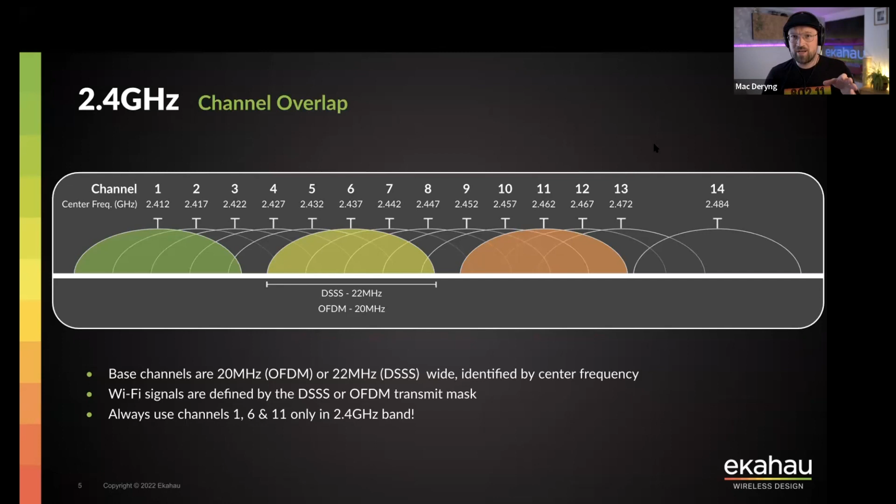But because of what Matt has mentioned, differences in regulatory domains and channels available in different countries, it is the best practice to stick to channels 1, 6, and 11, 3 non-overlapping channels, because even if you have 4 or 5 channels available if you're in Japan, most of the vendors out of the box will have channels 1, 6, and 11 enabled by default. And we will talk you through why and how it matters, what happens when you have overlapping on the same channel and overlapping on adjacent channel.

So Matt, could you? Sure. So when we look at the 2.4 gigahertz spectrum here, if you're inside the US, you can do a 3-channel plan, 1, 6, and 11. But if you're inside of Europe, for example, you can do a 4-channel plan where the channels do not overlap, channels 1, 5, 9, and 13. And why is it that we don't recommend that, and we are saying stick to just channels 1, 6, and 11?

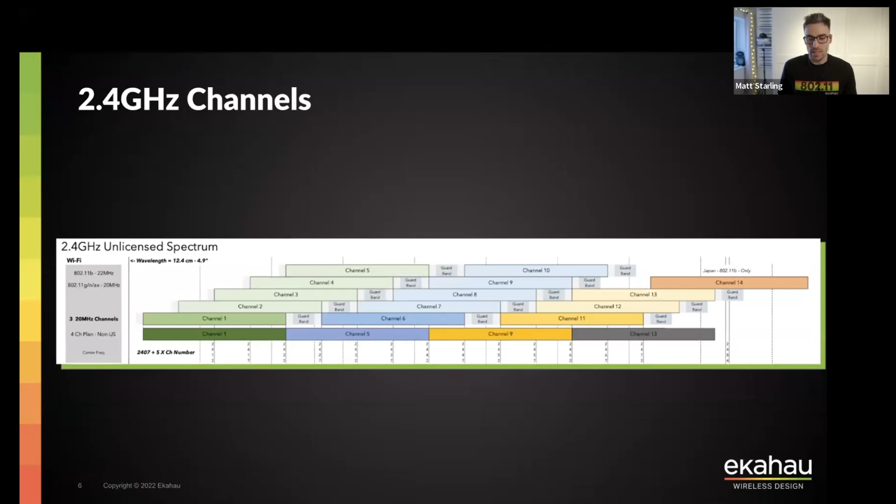That's because in our experience, we have never gone to an environment where there have never been any other 2.4 gigahertz wireless networks around by your neighbors or surrounding buildings. They've got their own wireless networks, and they're going to be using channels 1, 6, and 11 typically as well. So if they're using 1, 6, and 11, and you're using a 4-channel plan of 1, 5, 9, and 13, why is that bad? Because that causes something called adjacent channel interference.

So when we look at this graphic here, let's say in this example, they've picked to use channel 3 and channel 9. You can see how much that overlaps with channel 6. So why is that a problem? To keep it as simple as possible, adjacent channel interference is like Mac trying to talk to me in Polish. I've got no idea what he's saying. I don't speak Polish. I have no idea when he's going to stop talking so I can have my turn to start talking.

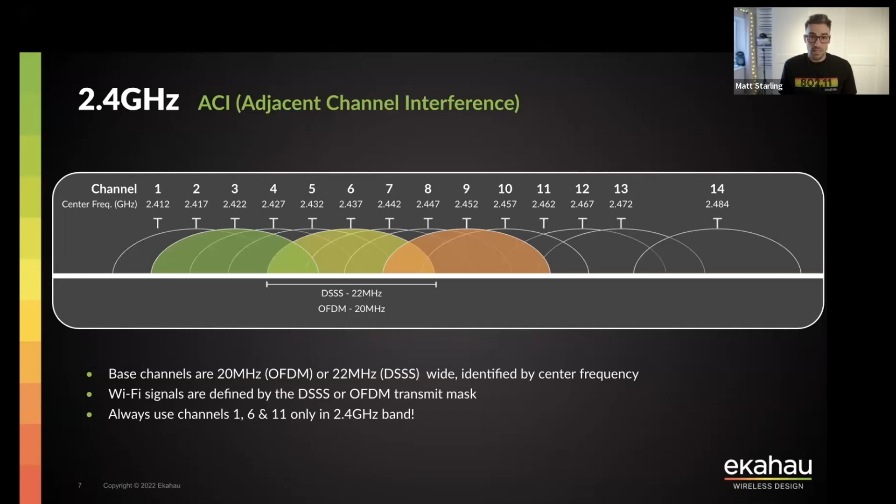So the reason why we say stick to 1, 6, 11 is because if you are going to have other access points and their radios on the same channel as you, it's much better to have what's called co-channel interference or co-channel contention, because this now means that when Mac is talking to me in English, I can understand what Mac is saying.

I speak English. I can understand when Mac's talking English, some of the times anyway. But I know when he's going to be finished talking, so then I can understand when it's my turn to be able to talk, because Wi-Fi is a listen before you talk protocol. So if it detects that anyone else is trying to transmit or talk over the air when you want to be, it will back off, let them finish talking before it will try and talk. Typically, anyway. Typically, yes.

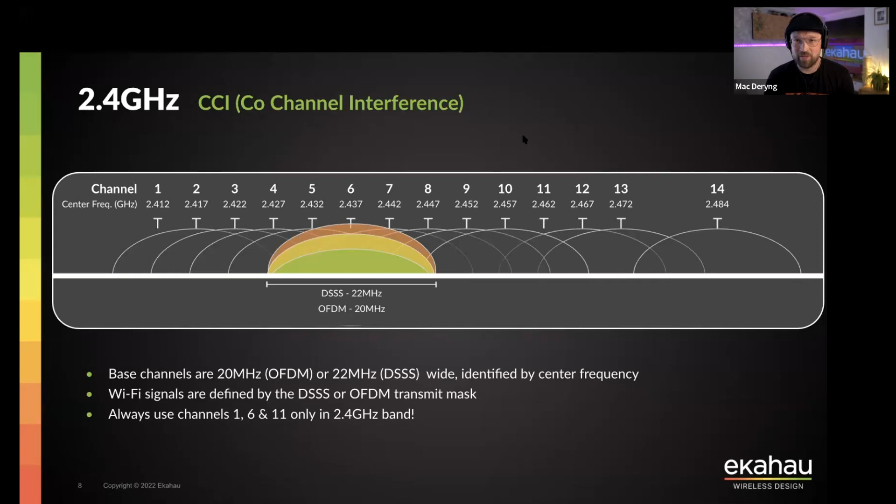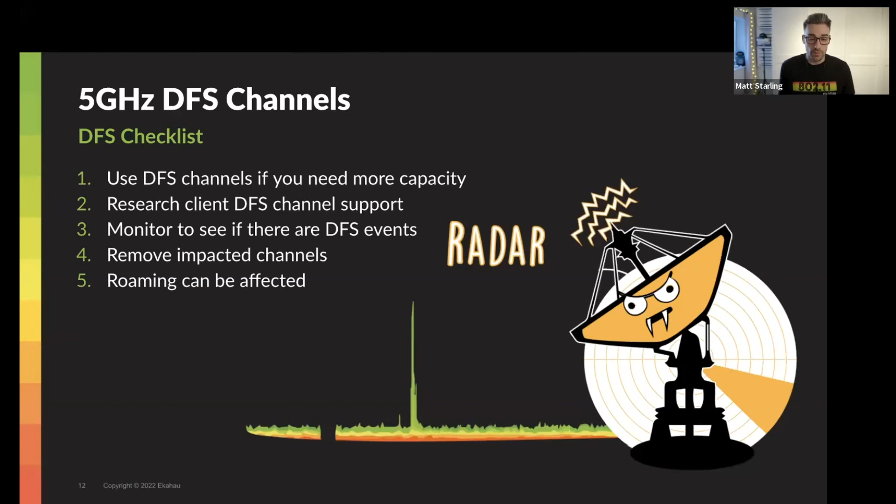So it's really important that we check what our client devices are capable of doing when we're doing the design. And in our 3 steps to great Wi-Fi every day, step 1 is extremely crucial: when you're having that conversation with the stakeholders who you're designing the Wi-Fi for, you need to understand what are the client devices that are going to be using the wireless network.

Because in this example, if we had just turned on channel 144 on our controllers, included it in our Wi-Fi designs, but then the stakeholder that you're doing a design for, their client devices don't support channel 144, as they move around the environment, they're going to potentially have some coverage holes, some coverage gaps, because they don't see the SSID being broadcasted from one of the access points that's using channel 144. So it's really crucial that we understand what our client devices support for what we're designing the wireless network for. So that's why it's really important.

You have this conversation, you check the manufacturers' data sheets about what channels they support. Unfortunately, not all of the manufacturers put on a data sheet what channels they support. So sometimes you might need to do a wireless packet capture. You can use the Ekahau Sidekick and the Capture app.

And what you want to do is capture the association frame from that client device and have a look through that packet capture. And inside of that association frame, it's going to tell you what the client device is capable of, and you can see the channels that it supports. And if you see, for example, maybe it doesn't support 4 of the UNII-2 DFS channels, then you could just exclude that from your design, and exclude that from your wireless controllers for your implementation as well. So a few tips there.

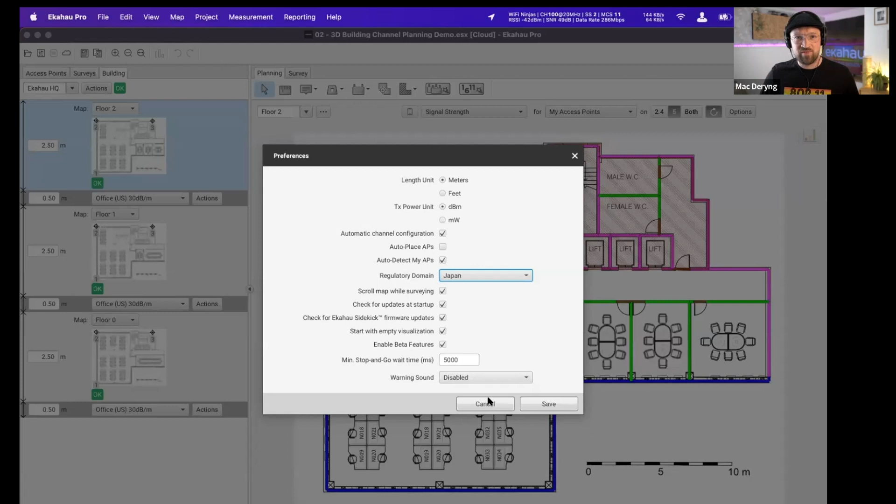And very quickly, another question, Peter asks, besides the effects of interference in dense environments, would the applications being used by clients also be a consideration for channel widths above 20 megahertz? How is this determined? So the quick answer is that for most applications, the throughput that 20 megahertz channels give you is more than enough. Clients need less throughput than you would imagine they do.

So your client might tell you that they need to have 300 megs per client, but it's not the case. Typically, in enterprise environments, all you need to do is to have a Zoom call like this one, maybe with some screen sharing, with a few cameras. You have to support web browsing, office applications, emails, and with a typical usage, you don't exceed like 2 megs.

For example, now I'm using close to 1.5 meg on a Zoom call. 1.5 meg. So 20 megahertz is plenty. But if you can use wider channels without introducing excessive CCI, co-channel interference, do it. It's better to have a network with CCI of, let's say, 2 for most clients than having 20 megahertz channels with no CCI in most cases.

But when the CCI starts to grow to 3, 4 or more, then the benefit of bonding channels and having more than twice the throughput as a result of bonded channels will start to fade because of increased contention. When clients want to transmit, they won't be able to because there is someone else transmitting on the same channel. So it's just a fine game of balance. Okay. Back to you, Matt.

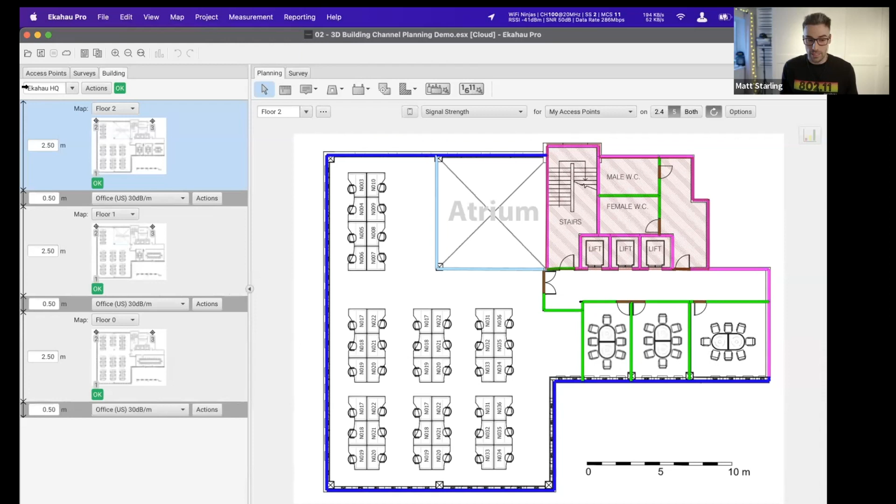So I want to show you how we can do a design across multiple floors, and then take a look at how we do channel planning across multiple floors as well. And I will show you a few of the ways that we can change and fix channel interference issues inside of Ekahau. So first of all, just wanted to show you that we've got our building configured and it's all green.

Okay. So what I want to do first of all is just place an access point. I'm just going to use this Aruba access point. I'm going to place it on the top floor, so floor 2, directly above this point here, which is called the atrium. So what we can see here now is the predictive coverage from this access point that is above this atrium.

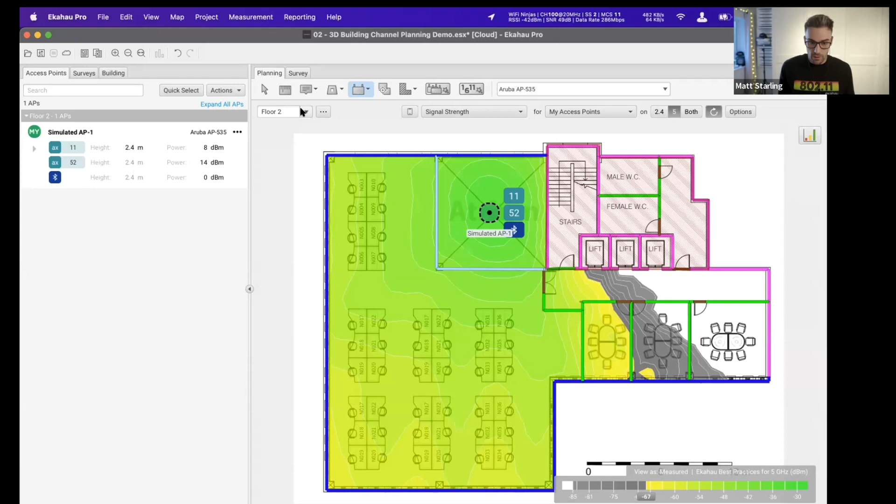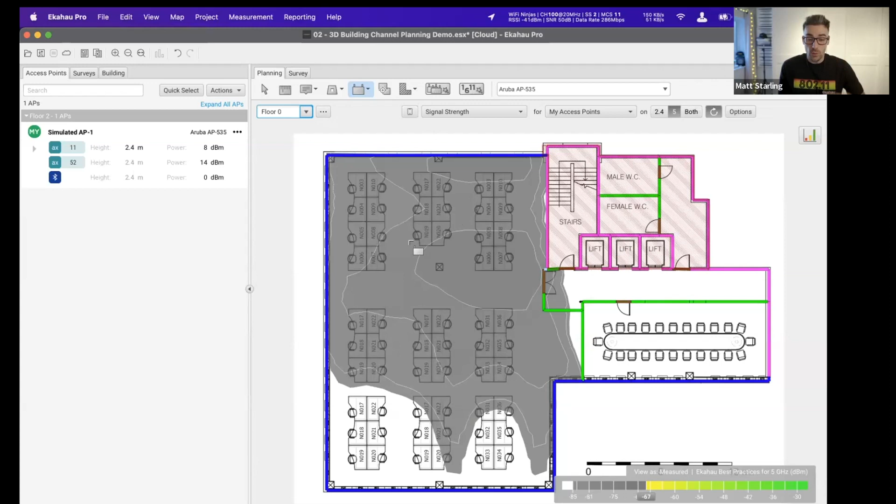And if I go down from floor 2 now to, let's say, floor 1, what we can see here now is that there's bleed through from the floor. So from floor 2 down to floor 1, and also if I go down to the ground floor, floor 0, we can see that it bleeds through all the way from the top floor to the first floor, and we can hear it down on floor 0 as well.

But what you might have noticed here is something that's called an atrium. So we've got an atrium that is right here. So I need to tell Ekahau, actually, there's a big hole in the floor here, and there is nothing to attenuate the Wi-Fi from the floor. So I'm going to come underneath the planning tab, and I'm going to switch to this option that is called the hole in the floor tool.

If I draw this now, where the atrium is here, and I finish drawing it, we now see no coverage above the atrium here. But if I move the access point back to where it was before, and we go and look at floor 1, we can see that the coverage comes through way more now onto floor 1, because we've said, hey, Ekahau, there is nothing here to attenuate the Wi-Fi from the ceiling of floor 1.

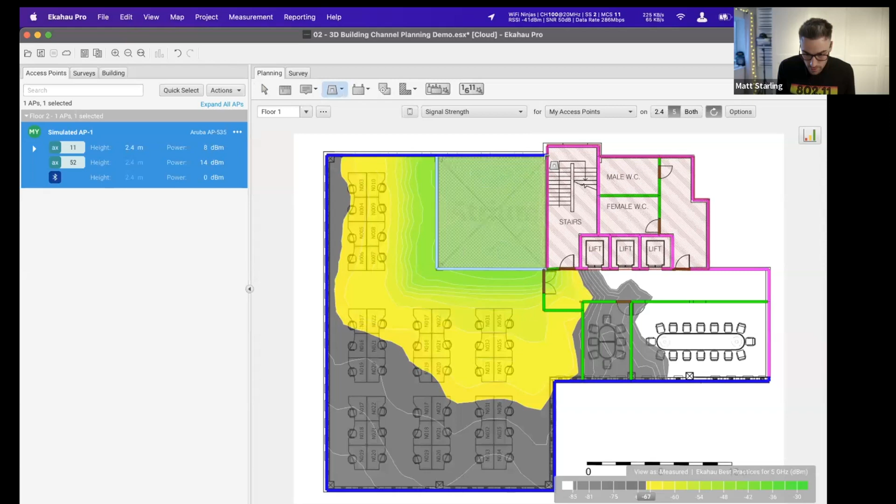And if we go down to floor 0, we can see that the coverage is coming through way more now to floor 0. But we actually have 2 atriums. We have an atrium on floor 1 and floor 2. So I'm going to create another hole in the floor right here. And once I've finished, if I go back to floor 0 now, I can see that the coverage comes through way, way more now, going from floor 2 all the way down to floor 0.

Okay, so now go back up to floor 2, let's get rid of this access point, and let's pick another access point.

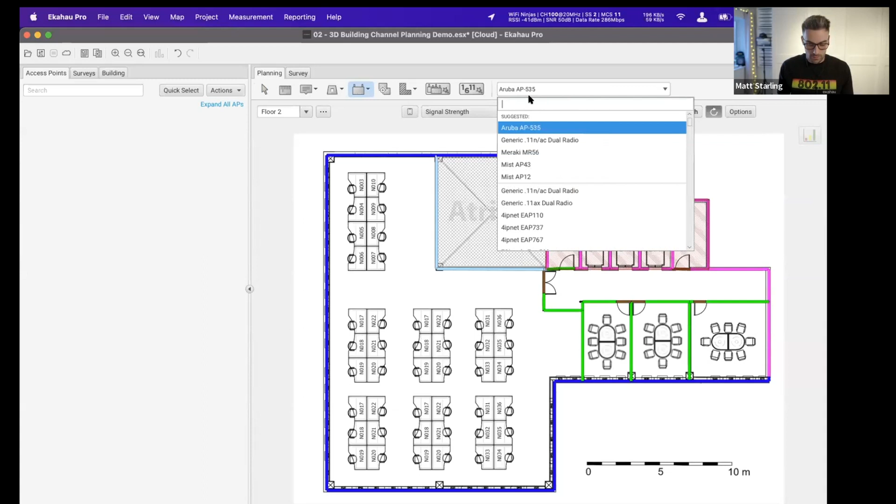Mac, what's your favorite access point? My favorite access point, Mist AP43, please.

Sure. So I'm going to type in Mist AP43. I select my Mist AP43, and now I'm just going to simply place a few access points, making sure we meet our coverage requirements. With 3 APs on floor 2, I can see that I've got primary coverage. I've got my secondary coverage.

Oh, not quite over in this corner. So maybe I need to rethink my design slightly. Pull this access point maybe over to here a little bit. And now I'm happy that I've got my coverage requirements being met nice and easily on my top floor. So how about for the floor below?

Oh, quite a lot of coverage there, but I don't necessarily want to rely on coverage from the floor above to cover my floor below. So I'm actually going to place some more access points down here as well, and I'm probably going to place them in a similar position. So 3 APs, I'm quite happy with that.

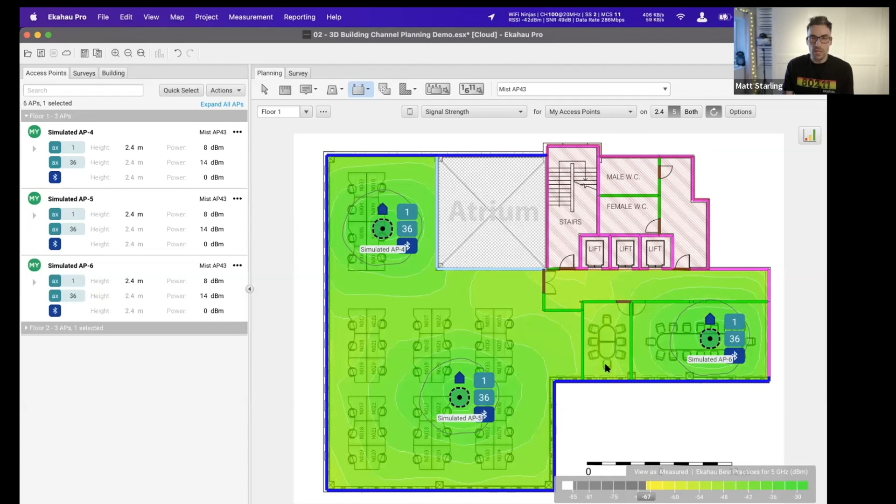And then, actually, I just want to turn off the Bluetooth radios for now, make it a bit cleaner. And then I want to place some access points down on floor 0 as well. So again, we'll go 3 more access points, one in the big conference room, 9 APs now. I'm very happy with my design. I've got my primary coverage and my secondary coverage working very nicely everywhere.

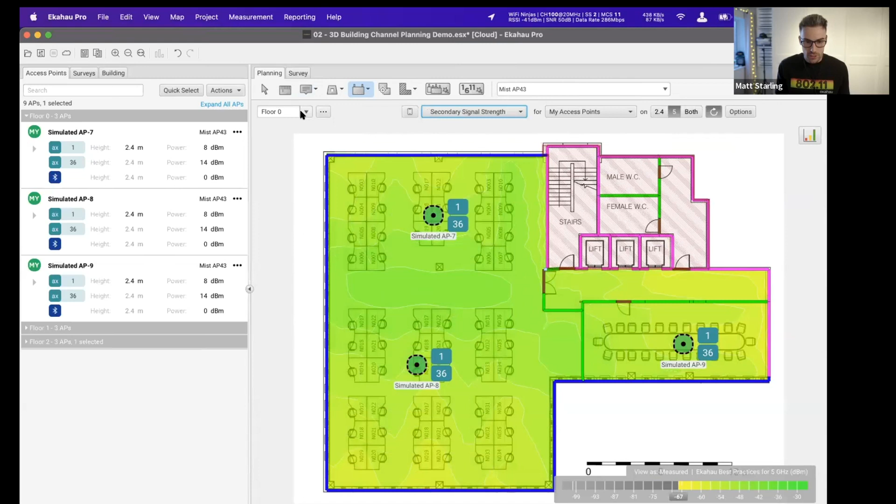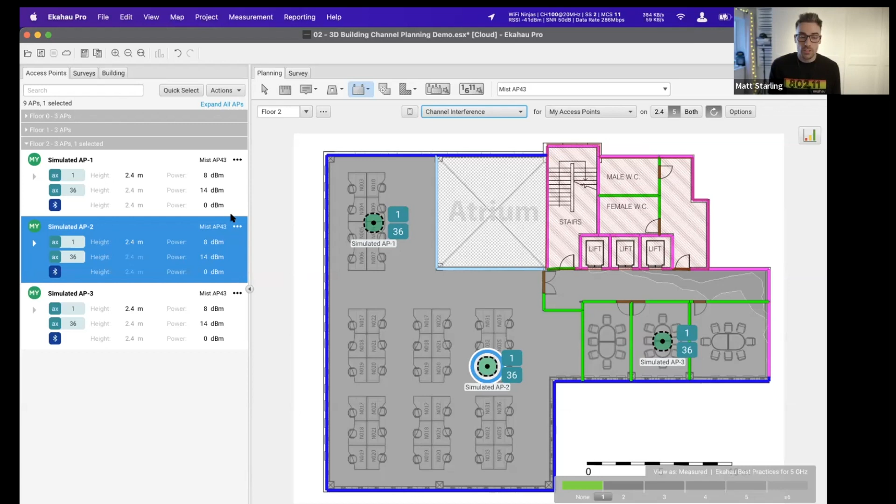So if I go back up to my top floor, the next thing I want to look at is, am I meeting my channel interference requirements? So now if I go to channel interference view, we're looking at the 5 gigahertz frequency band at the moment, and it's failing because all of our access points by default go into channels 1 and 36. So what I need to do is start changing the channels of these access points, and I'm going to start with the 5 gigahertz radios.

So if I go over AP1, I can right click on the access point and go to edit access point. The option for the 5 gigahertz radio is radio 2. So I can change it from channel 36 to, let's say, channel 40. If I close it, it has now changed the 5 gigahertz radio for AP1 on to channel 40. I can do the same for AP2, go edit access point, move it on to, say, channel 44, close.

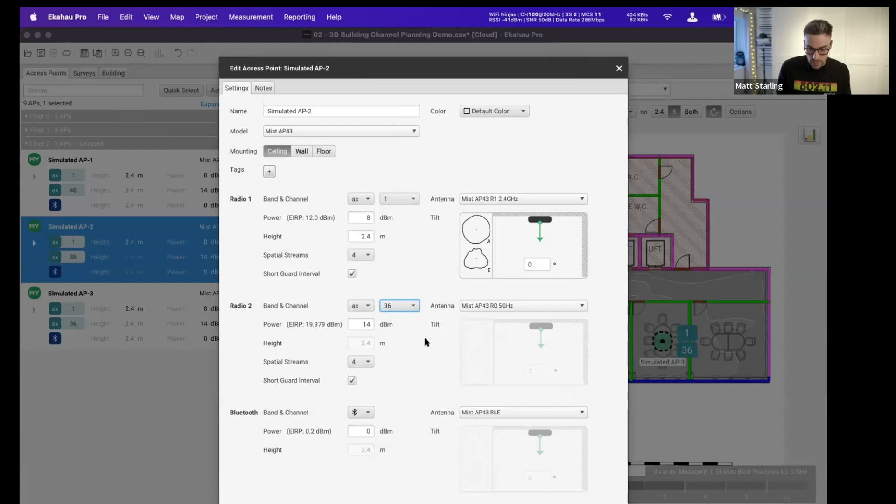And then we saw a little bit of change happen here. If I hover my mouse over here, we've got 6 other interfering radios on the same channel. But over here, how many have we got? 5. Okay, so we're starting to fix the interference slightly. Let's do one more for AP3, change it to channel 48 on 5 gigahertz. If I hit close, we've still got problems because we can hear the other access points on the adjacent floors. So I need to come down to floor 1 and change the channels on these access points as well.

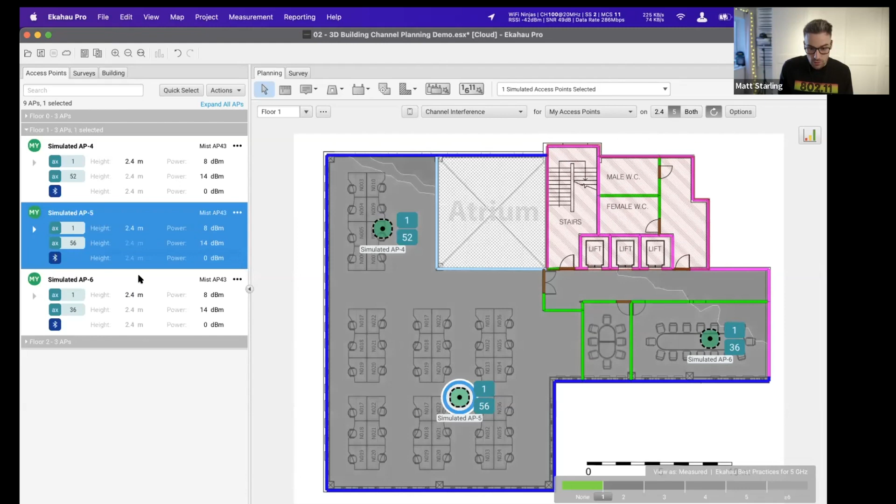There's another way that we can do this. If I come over to this view on the left-hand side where the access points are, and highlight simulated AP4, if I just click on this radio here, it gives me the option to change the channel directly, to say channel 52. If I move on to AP5, I can move this one on to channel 56, and AP6, I can move that on to channel 60.

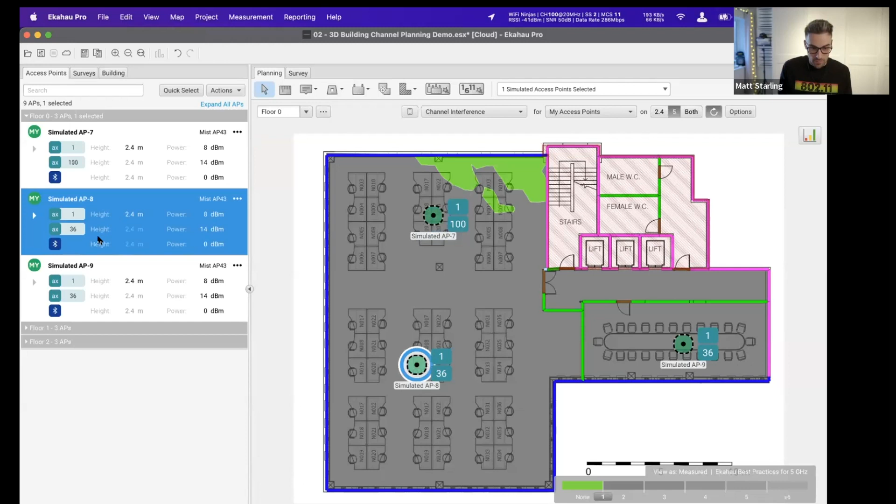But we've still got channel interference, and that's because if I go down to floor 0, all of these access points are still on channel 36. So what happens if I change these APs to a different channel? I'm going to go channel 100, and we've got some green that starts to creep in. How about AP8? If I change this one to channel 104, everything has now gone green. If I hover my mouse over the map, we've got no channel interference. So we are very happy now on 5 gigahertz.

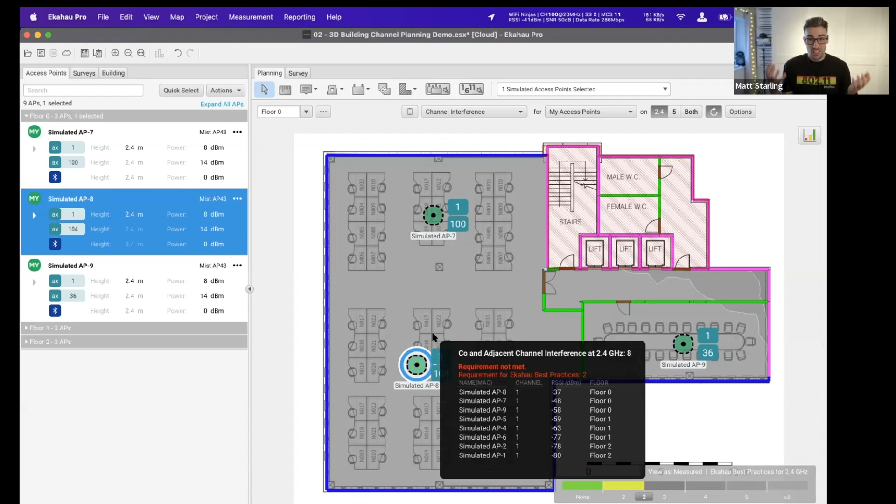But how about on 2.4 gigahertz? Well, yes, we're going to have some channel interference on 2.4 gigahertz because we haven't changed the channels yet. So we could take a similar approach where we just go around and change the channels manually one by one. But that is only 9 access points, and it took a little bit of time. If you're doing a design with 100 or 1,000 access points, you don't really want to go around and change every single one manually.

So we have actually got a way faster, way cooler way to do channel planning inside of Ekahau. If I hover my mouse over this icon here, it's called the channel planner tool. And if I click on it, it pops up this automatic channel planning wizard.

And what we can do here is we can do a design for both frequency bands, or if I just wanted to focus on the 5 gigahertz, I could select just 5 gigahertz. We have another option here that says disable any unnecessary 2.4 gig radios. We can then pick what channel plan we want to do, like a 1-6-11, a 1-5-9-13. Remember, we always typically want to stick to a 1-6-11, so I'm just going to leave it as that.

And then we have the option for 5 gigahertz. So we did a design using 20 megahertz wide channels. But what we can do is we can change it from being 20 megahertz wide to 40 megahertz wide, 80 megahertz wide, or 160 megahertz wide. I'm not going to change that just yet because now we've got the option for selecting the 5 gigahertz channels.

And the question that we had earlier is, should we include channel 144? And again, it depends on if your client devices support it or not. But if you did your check and you found that your client device didn't support channel 144, we can simply not include channel 144 in our design by unselecting it from here. Maybe your client devices don't support channel 140 as well. You can unselect that too.

And now if we change from 20 megahertz wide to 40 megahertz wide, it groups the channels together. You will see it reduces the amount of channels that we can use on 5 gigahertz. If you go from 40 megahertz wide to 80 megahertz wide, again, it reduces the amount of channels that we can use. And if we want to do a 160 megahertz wide plan, we absolutely can, but I'm not sure I would recommend that for any environments, maybe other than your home environment if you live miles away from everyone else.

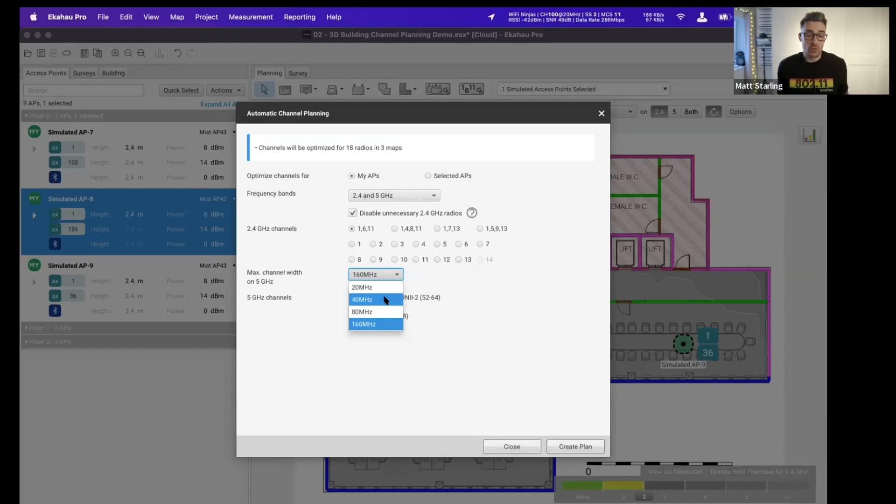Yeah, so what I want to do now is see, we've got a 20 megahertz wide channel plan that works in this environment, no problem at all. But I wonder if a 40 megahertz wide plan would work. So I can select 40 megahertz wide and hit create a plan, and what you'll see is that all of the access points changed their channels. Ekahau has disabled some of the 2.4 radios, and it has also put the 5 gigahertz radios onto 40 megahertz wide channels. The reason I know these are 40 megahertz wide is because this symbol shows me it's now using channel 108 at 40 megahertz wide.

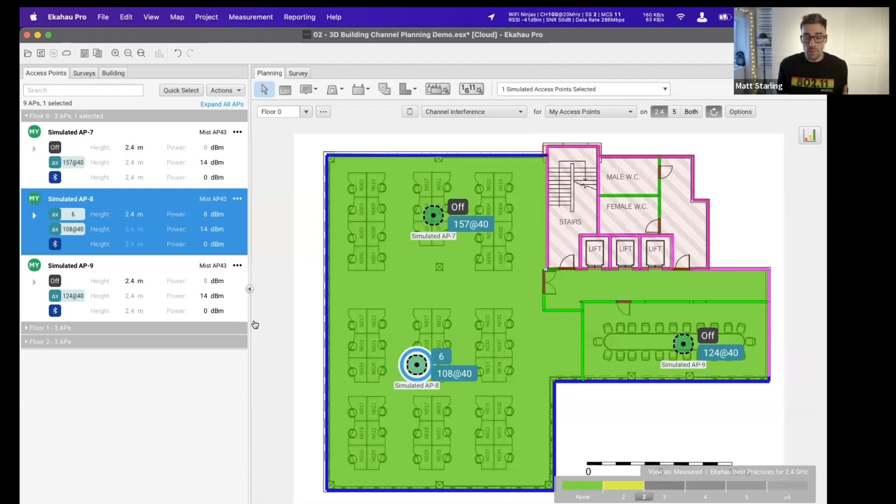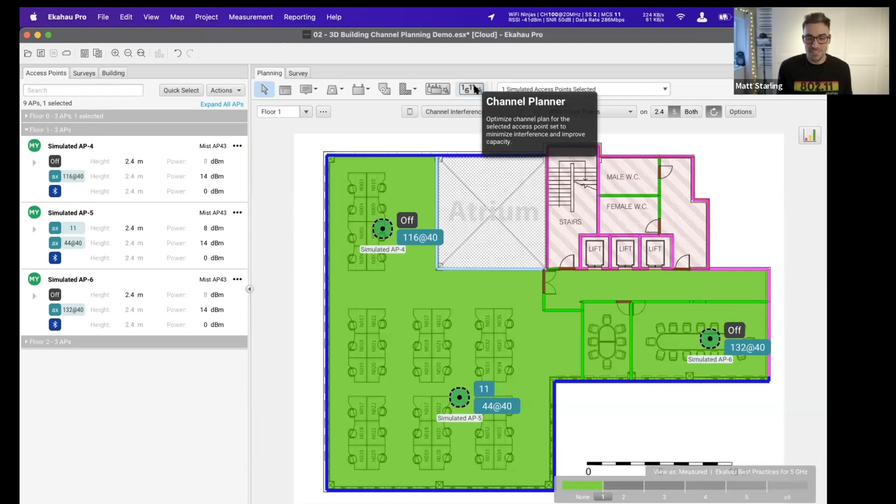So with a simple click of a button, Ekahau has come up with a design that meets the requirements for our channel interference. On 2.4 gigahertz and 5 gigahertz, we've got a 40 megahertz wide channel plan that meets the requirements, just by running the channel planner. Should we see if an 80 megahertz wide plan works? Since it's so quick, why not? I'm going to click on the channel planner tool, go from 40 megahertz wide to 80 megahertz wide, and create another plan.

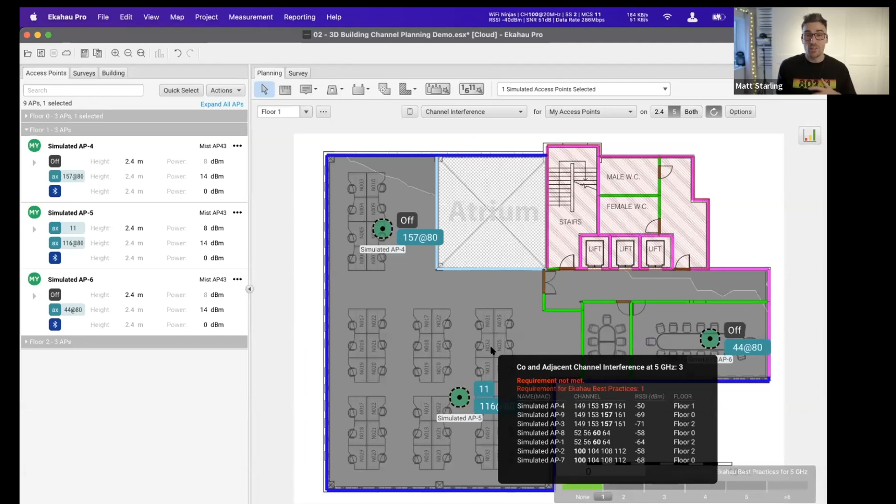And oh no, we've now got channel interference. If I hover my mouse over here, we've got 3 of our own wireless APs all on the same channel. Remember earlier when we said use the widest channel you can until you can't? This is exactly what we meant. I've gone to 80 megahertz wide channels and it's caused channel interference. So what I should do in my design is go back to the 40 megahertz wide channel plan. That worked, no issues. That's what we should use. So that was all the demo that I wanted to do today around channel planning inside of Ekahau.

Mac's going to show you some awesome product updates that we've got with Ekahau Insights that's only launched this week. You mean yesterday? So guys, before I share, actually let me share and then answer one more question. So I am sharing my Chrome. It's disappeared on me now. But before I go there, there is one interesting question from Peter. I think it's another question from Peter actually.

Some manufacturers ship their APs with 80 megahertz channel width as default and claim that once interference is encountered, the width will automatically be reduced to 40 or 20 megahertz by the wireless LAN controller. So why go with a fixed value? Is it that the controllers are not aggressive enough? So that's a very good question. And the answer might be as long as the entire webinar. So I'll try to keep it super short this time.

There are vendors that are doing it better than the others, but it's not unusual to see an out-of-the-box wireless LAN that has a mixture of 20, 40, and 80 megahertz channels. And while it might seem like a good idea to have wider channels in more heavily used areas, having mixed widths of your channels can introduce 2 issues.

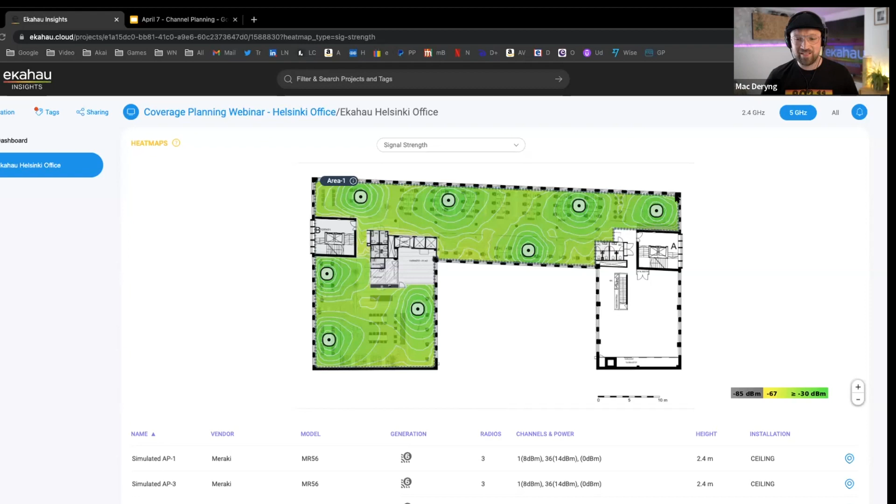Even if you're not interested in reporting for Insights, this is a very sleek view. You can click on the area, you can see the requirements specified. You can highlight each and every access point and see signal strength from one or more APs. If I deselect the AP, it shows for all my APs there.

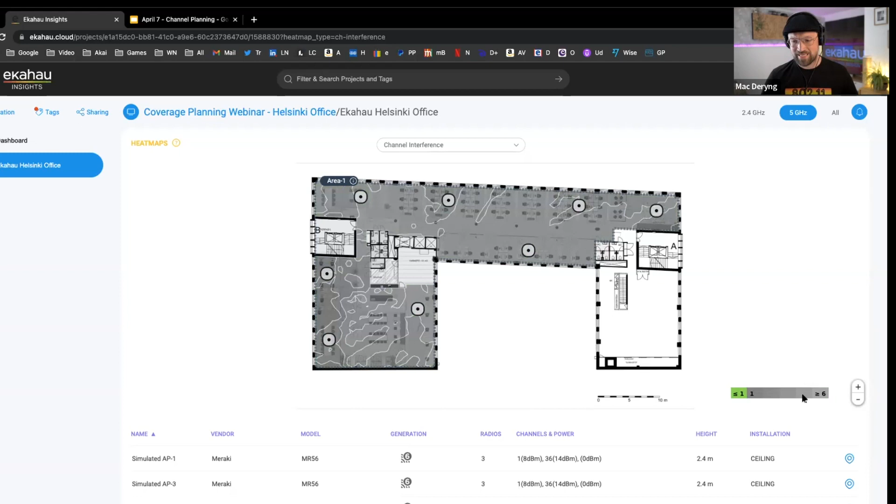You have different visualizations. So for example, I can see that the coverage here is amazing, but how about channel interference? And it's all gray. It's quite massive. It looks like it's 3 or 4 or even more. You can see network health all red because of network issues, channel interference. We didn't have that for design files before.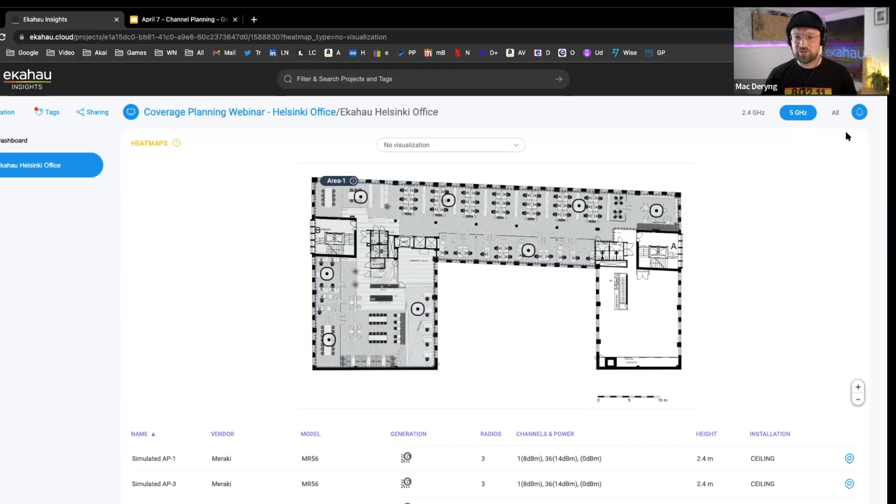So now, if I wanted to share this particular file or a survey file with a team of people that you might be sharing files with quite frequently, maybe more than just one person, you can create a group of people now. So when I go to profile and license, I have my sharing group.

I've just added Matt there because I have no other friends in life.

But if I had a massive team of Wi-Fi engineers and I wanted to keep on sharing files with them, I could add them all here to the group. And then when I go back to my project and I hit sharing, where is it?

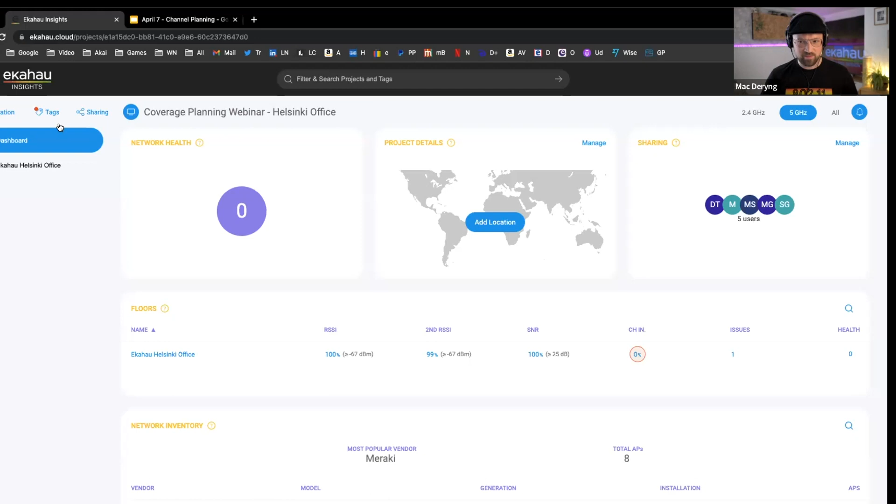Where is my sharing? Click on sharing. Yes. I think it might be because I'm the owner of the project. So that's the case. Yes. So when I've shared it now, I can share it to the group. If you pick another one. Okay, there we go. That's a good shout.

So that's a project that I'm an owner of, and I can share my file with my group, all of the people on the group. So if it's your employees, for example, and one person leaves the employment, you can just remove that one person from the group, and the access to all the projects that you've shared with the group sharing functionality will be revoked, which is a great thing.

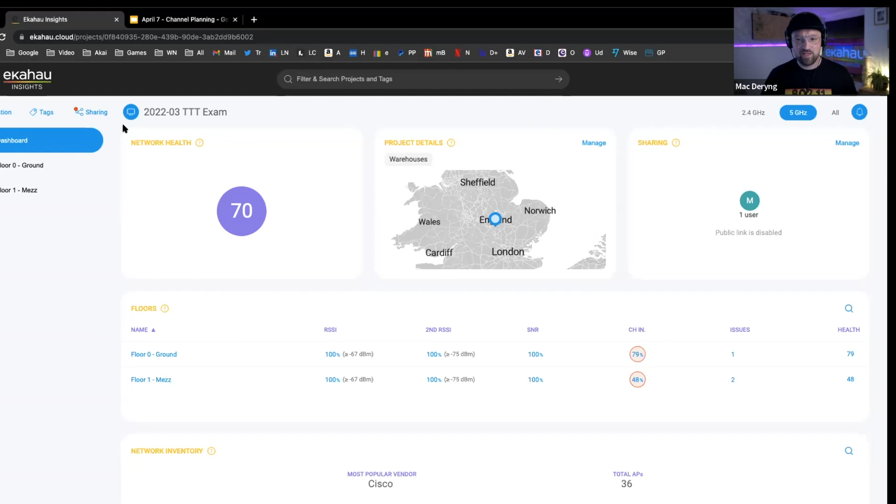So guys, look around Insights. It's changed quite considerably. You can view different bands like 2.4 and 5 now. You have a new notifications button, so I can see what's changed by who and when. You can even set notifications to send you a daily email. So these are quite big improvements when it comes to your workflows using Insights. And the other thing actually, oh, sorry, go ahead, Dale.

Sorry. I was just going to say we got an interesting question while you were presenting Insights. The views there, Chris asked, are they mobile device or as measured views within Insights? So that's a good question. Yeah, this will be what you've got inside of your design file set. So typically, it's going to be not using the mobile view in this option right here.

But the one thing I just wanted to call out as well is that you can share your design project files now with people that don't have an Ekahau license. So if you need to share this with people that may be doing the installation for your design, you can share this file with them and they can access everything that they can see here. They can see the bill of materials, the height of how the access points are supposed to be installed,

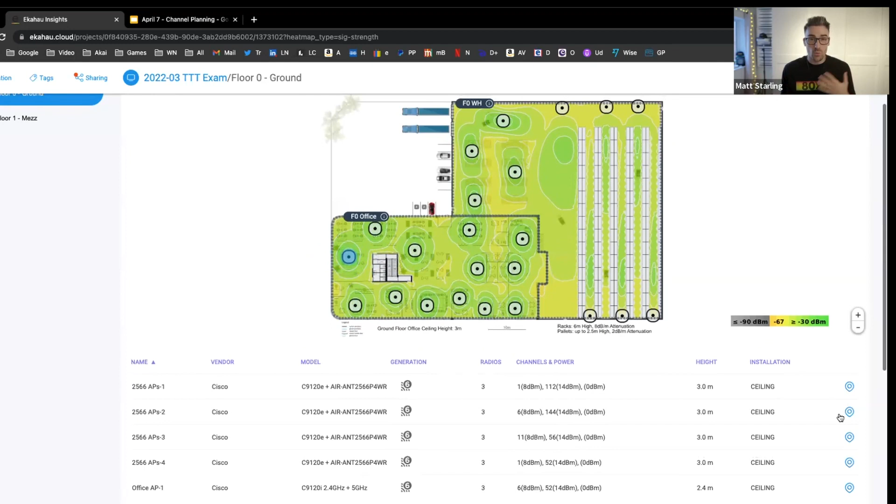the ceiling. And Mac, if you just press on one of those blue little icons next to it, you can locate particular access points on the floor plan, which is a really nice way to be able to find out where is this specific AP that I need to install with an external antenna. Improvement. So go check it out.